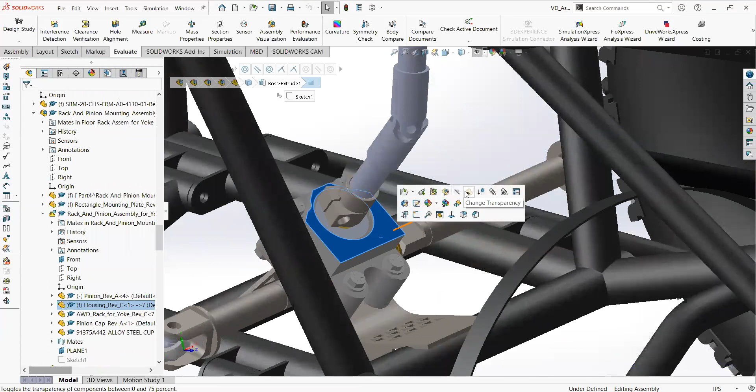That pinion is connected to a steering column made up of several tubes. In this case, we have 3 tubes connected with 2 single cardan U-joints, called single cardan because there's 1 point of movement within the U-joint. We have 2 single cardan U-joints because the rack for this car is off-centered from our center plane, so we want the axes of rotation where the steering column intersects the pinion and where it intersects the steering wheel to be similar.

The steering column is connected to a quick disconnect, which is connected to a steering wheel. The steering wheel turns the steering column, which turns the pinion, which turns the steering rack. The steering rack is also connected to tie rods.

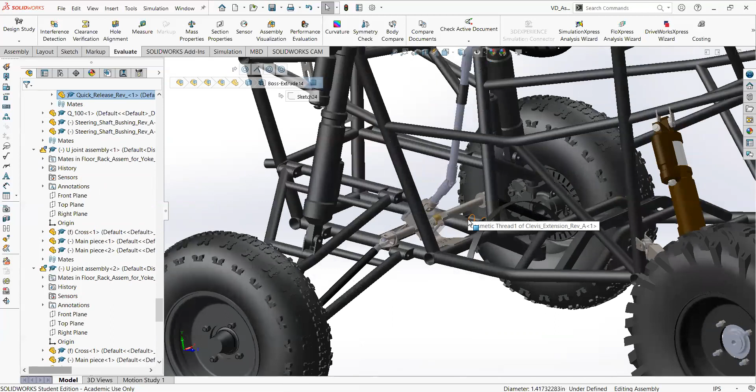For this year, the tie rods are adjustable, which if you zoom in you can see through the threads, allowing us to adjust steering characteristics of the car. This tie rod is also connected to a steering arm, shown on the wheel.

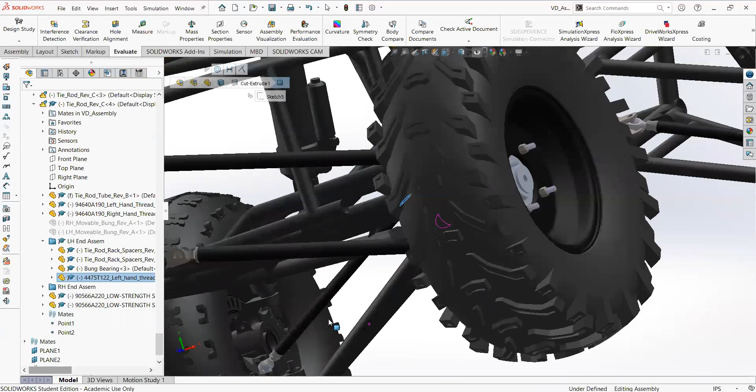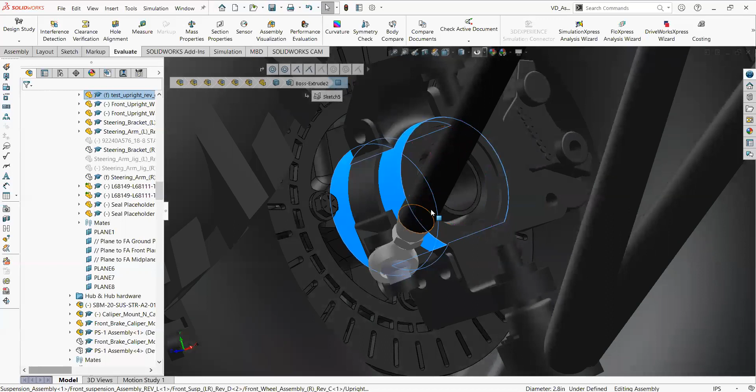The tie rod connects to a steering arm, which connects to a steering bracket, which connects to an upright, basically that big blocky thing in the middle of the wheel. So as you turn the steering wheel, you move the rack linearly, which moves the tie rod, which moves the wheel.

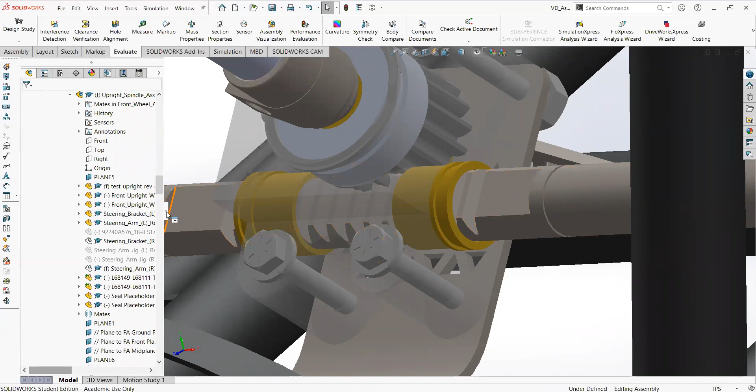If you look closer at the rack, you can see some blocky bits next to the sides of the rack. They're hidden here, but they'd be small circular bits called O-rings, and we call those bump stops because we don't want the rack to move too far from its center.

We want to prevent the wheels from locking, which means instead of the wheels turning, you're basically pushing the wheels against the ground. We don't want that, because that just prevents us from moving entirely.

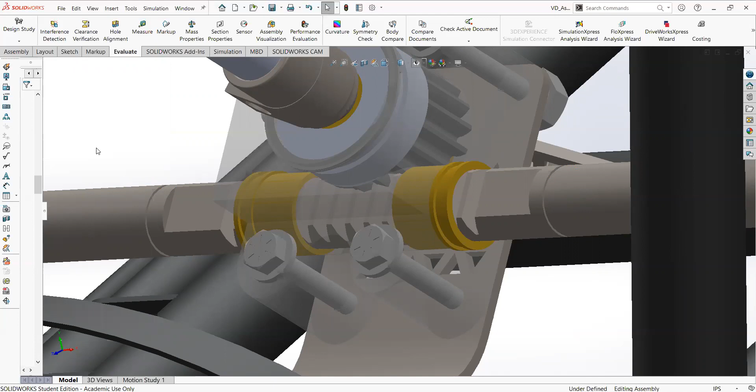For manufacturing, we were planning on manufacturing the pinion, but for now we're reusing old pinions from our steering rack. The old manufacturer for our rack is no longer in business, so we've taken to manufacturing the rack ourselves using the lathe.

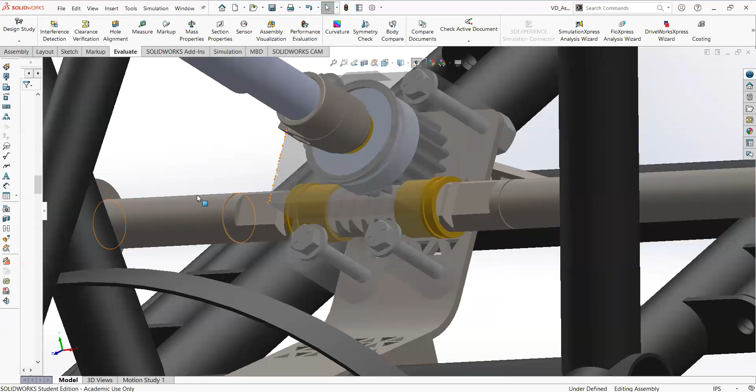To get the teeth made, we send those to off-campus manufacturers to finalize. As for the steering column, we cut the tubes and purchased the single cardan U-joints. That's basically it. Any questions?

To clarify a little more on the rack itself: something you'll learn later in your classes, there's a set number of teeth on this rack, and based on the different characteristics of the gear, like the pitch and so forth, the rack itself has a ratio of 6.4 to 1.

What that means is the amount of times you have to turn the steering wheel to get your tires to turn, so it's a ratio between your steering wheel and your tires. The higher your ratio, the more you have to turn your steering wheel to get your tires to turn 1 degree.

The higher that ratio is, the easier it is to turn your steering wheel, which is a good thing, but you also have to remember that the higher the ratio, the more you're going to be rotating your hands. You don't want to do that when racing because, first of all, you have wrist restraints on, so you can't overlap your hands, and also it's just undesirable.

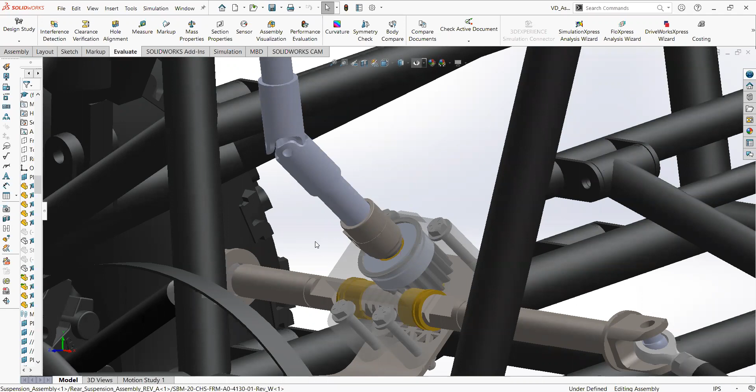There's also a lot that goes into the geometry — the coordinates. You can't just place your steering rack and steering arm in random locations. Steering and suspension, as we'll go into detail in a different lesson, are very specific.

There's something called toe and camber. Toe is basically how far in your tires are going. I can find a picture for you, one second, I can pull it up from the manual.

Based off of where you're putting your components, you're going to get different toe in and toe out values, and that changes how your car travels in a straight line and in curves, as well as over bumps. Let's say you're going over a bump and your tires want to toe in — then when you reach the ground, your car is going to want to jut in one direction and become unstable. So, long story short, we have to place these components in a very specific location to get desirable values.

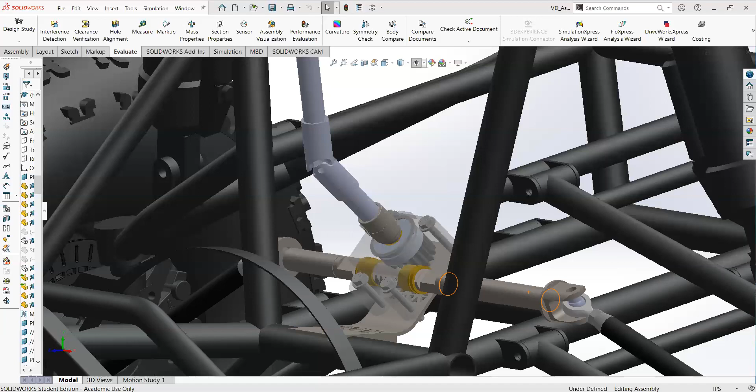So now you guys can see my screen, the SolidWorks screen. Yeah, we see SolidWorks, go on. Yeah, okay, great.

Like I said, we'll go over the different geometry points at a later time, but that's actually all I can think of for steering. Does anyone have any questions?

It's not a very intense subsystem by any means, but it is very, very crucial at the same time, so we do a lot of testing with this. We'll put strain gauges on components like our tie rods to make sure they won't break. That gives us a ton of data points on when the component experiences a lot of stress, whether it's going through turns, jumps, or over logs. So we'll be able to see when the tie rod is closest to breaking and if we need to increase the factor of safety.

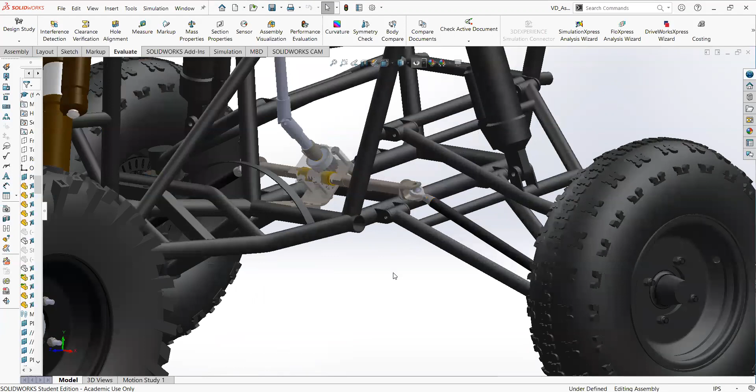That is a very big test we've had to do recently, and actually we weren't able to finish because of COVID. But the reason that was so important is because one of our tie rods actually broke during competition in 2019.

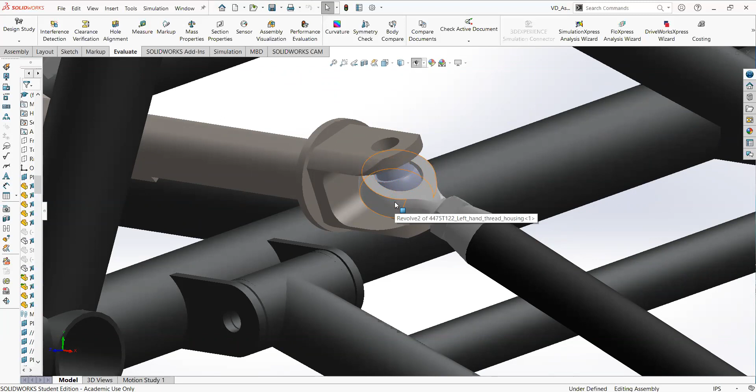The bung completely snapped off at this point, right here, it just snapped open. Thankfully we were on our last lap, so it wasn't completely devastating. We made it through the finish line with half of a wheel sticking out. It was kind of crazy, but obviously we don't want that to happen again, so we've had to do testing, and we'll continue testing when we're able to go back into the shop.

Does anyone have any questions? How do you adjust the camber or toe? I think for the most part it comes up to the software we use, isn't it? We can really only adjust toe with the adjustable tie rod, not really the camber.

Camber is a suspension characteristic, and you would affect the camber in different ways. Let me post a link of how. So that's more like suspension, not really steering, right? Right, camber isn't steering, but they go hand in hand. Recently we've had to create new coordinates or location points for our steering and suspension because we're redesigning the car. To change the toe, I've found that the components that affect the toe will also change the camber. But if your toe is getting better, your camber is getting less desirable, so it's hard to find that middle ground. Let me send a link for the camber.

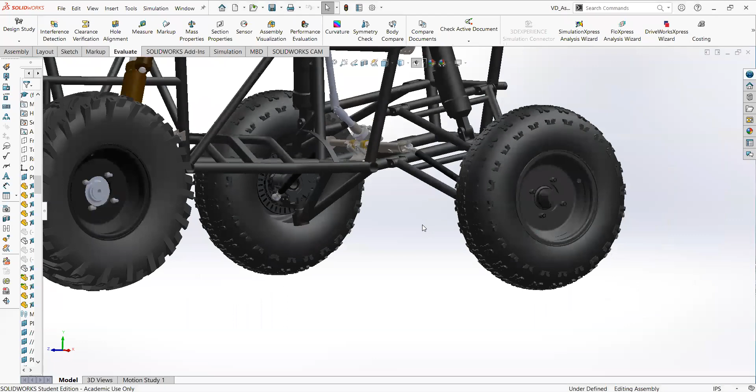I'm not quite sure if this is the question, but there's two components to it: design and implementation. On the design side, we're using the suspension software Lotus to get all our parameters together, which we use to make the CAD as well, but we use it to actually jig up the suspension itself when attaching it to the car. We set it up with the desired parameters in terms of caster and camber, such that we weld the tabs that attach the suspension components to the car in the position that achieves the desired suspension parameters. I'll go into more detail in our next lesson explaining what camber, caster, and toe is, and show the Lotus software we've been using, with examples of how changing one component throws off everything else.

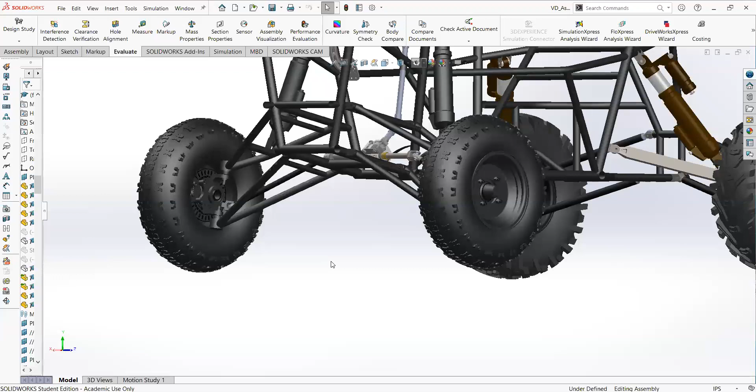So just in general, for something like Baja racing, do you want more negative or positive camber? More negative, I guess. It's better for cornering because the more you grip, you turn, right? Yeah, exactly.

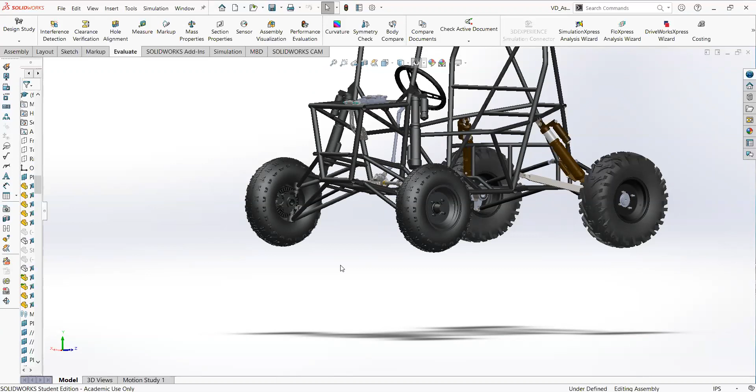Going a little more into that, when you have negative camber and you're going through a curve, your tires get pushed, and your contact patch - basically what part of your tire touches the ground - gets bigger. That's better during corners, so you have a greater contact patch, which is why negative camber is more desirable. I was asking because I thought it would be weird since it's dirt, not tarmac, so I couldn't imagine how that changes anything. Camber is one of the biggest suspension characteristics, and I personally feel it makes a very big difference, especially in cornering and handling.

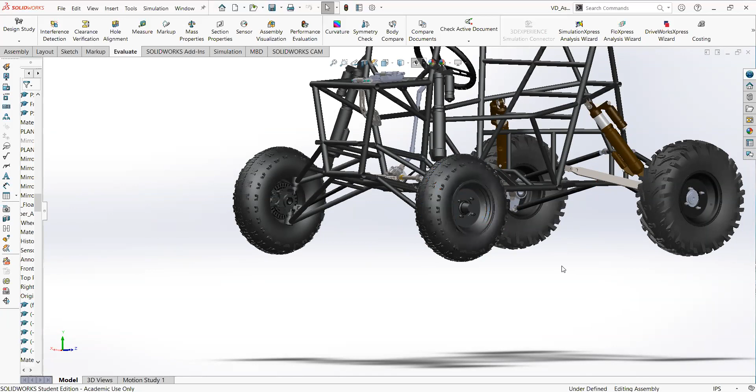All right, is that it for steering? Does anyone have any questions? I can't really see the chat, if anyone does, who doesn't? But if not, we can go on to suspension. All right, let's do suspension then. So Nikita, do you want to?

The suspension subsystem of the vehicle is responsible for the mitigation of all the forces that the vehicle experiences while in transit, as well as allowing for the delivery of power to the wheels from the powertrain. In the front, we have what is called a short long arm suspension, such that there are two control arms, wherein the lower control arm is longer than the upper control arm. Generally, we notch tubes into the shape they need for the suspension control arms, then jig them up and weld them.

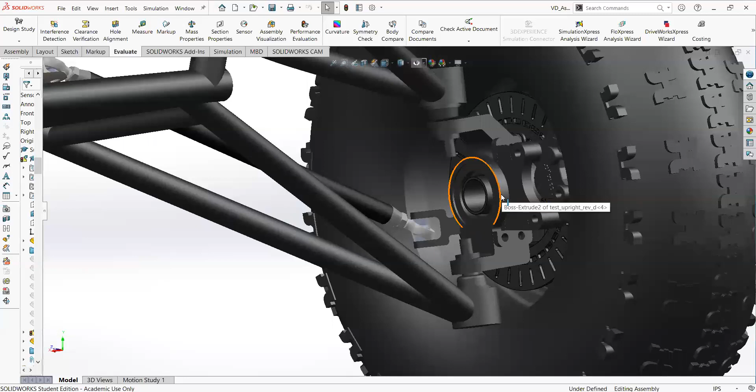As you can see, there's an upper control arm to which the shock itself is mounted, and the chassis mount of the shock, and the lower control arm. Both control arms are attached to the upright, which contains the hub of the vehicle. On the upright, there's also the steering arm, which connects the steering rack to the upright, enabling steering input to be delivered to the upright to change its position while in transit.

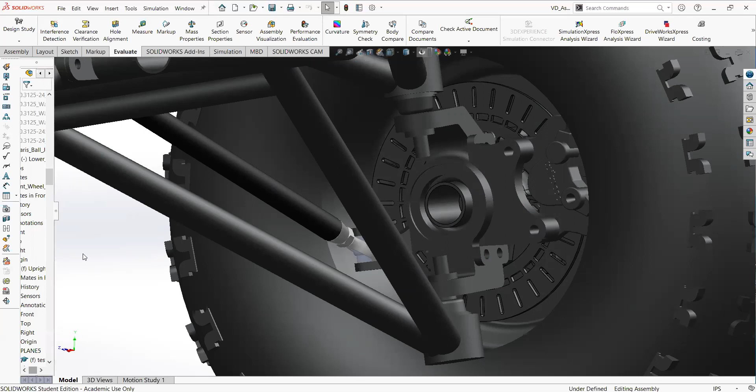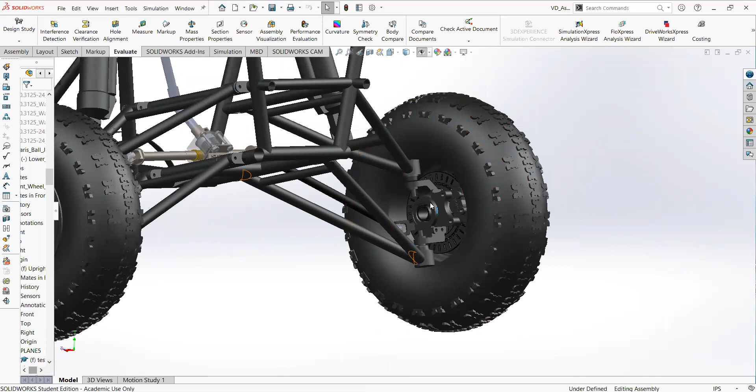Wait, hold on, can you pause for one second? Does anyone know how to change this from being black so we can see it properly? I think it's a render thing - the more components you have, the more the computer has to allocate for rendering until a limit is reached. I feel like some of us have changed it all to the same color. I thought it was different colors before, but I could be wrong. Maybe someone changed the material? I don't think that's the case though - the shocks are black, so I think it's just rendering. Someone's changed the color. We can argue about that later, it's fine.

This part is the upright. I don't know if you guys can see it, but this whole thing - as you can see, the upright allows for interface of all these components.

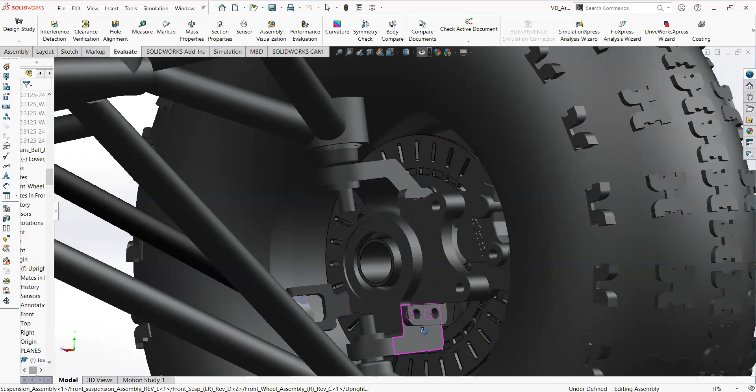You have the attachment point for the brake caliper, and then the brake rotor, which is attached to the hub, which is attached to the upright. Between the hub and the upright you have multiple bearings to allow the hub to spin and to allow power to be delivered into the hub by the CV axle. On the hub itself is mounted the wheel and tire, respectively.

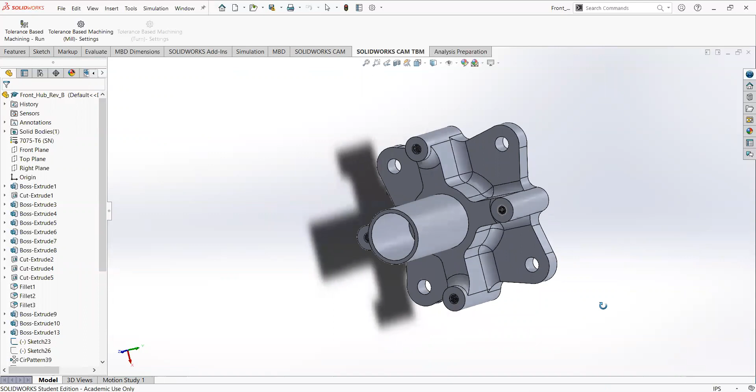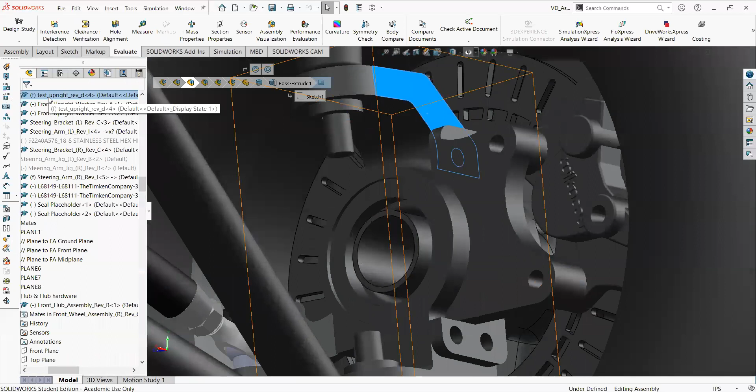So as you can see, this is the hub. You have that part sticking out which is where the CV axle goes into. This interface between the axle and the hub is called splines, but that's a whole other discussion. The axle goes in there, and then you have holes on the inner end of the hub to which the brake rotor is mounted, and on the outside you have the holes for mounting the wheel itself.

This right here is the upright. As you can see, you have the points on the top and bottom to which the control arms are attached by means of the ball joint. I'm not sure if y'all have experience in automotive, but it's a fairly common component.

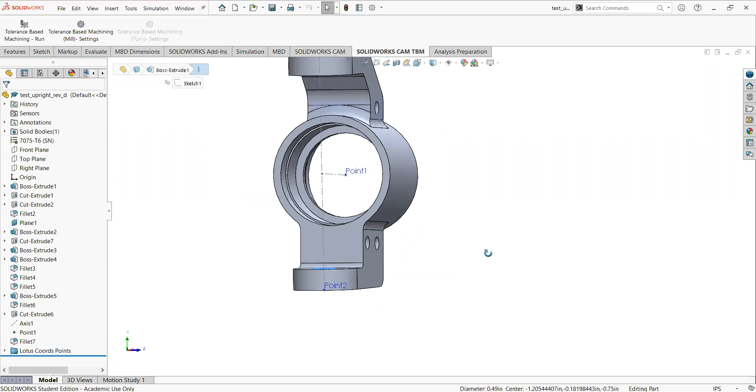Then you have the area in the center for mounting the bearings on which the hub is mounted, such that the hub can spin. You have the holes on either side of the upright to allow interface between the brakes and steering to the suspension, such that the brake caliper attaches on one side of the upright and the steering fork on the other side.

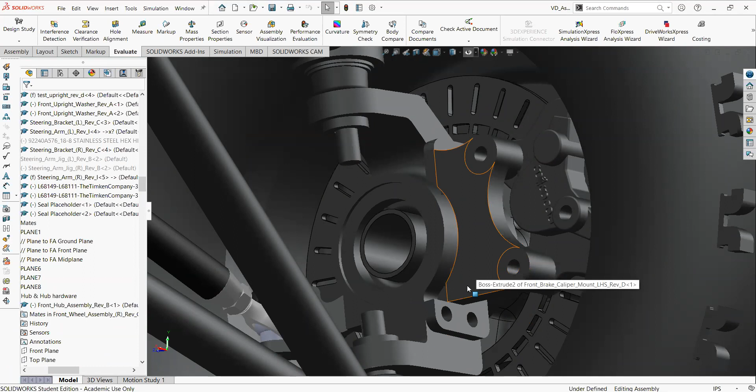The brake caliper and brakes - this is currently Rev A, so things will be switched for Rev B - but you can see that's on one side of the upright, which is this thing, and then you have the steering arm on the other side, which is attached by the steering bracket to the upright.

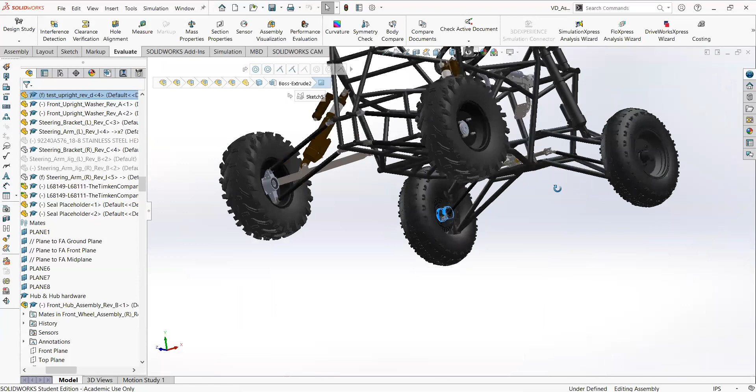Yeah, okay. Do you want to talk about the shocks now? And then we can go to the rear.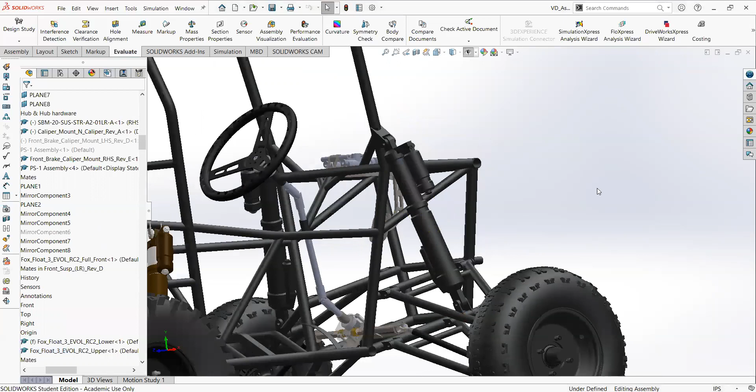The shock absorber itself is a component that absorbs the shock that the vehicle experiences while traversing terrain. You can see it's attached to the upper control arm as well as the chassis. So when the wheels go up and down, the forces that the vehicle experiences are mitigated by the shock absorber component.

I'm not sure if it's worth going into specifics, but this particular shock absorber has 3 different chambers in it to allow for a variable rate of motion of the whole suspension.

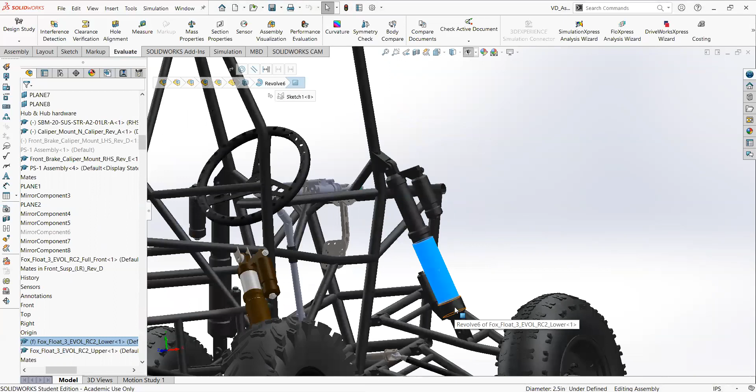Yep, and we currently use air shocks. There are different types of shocks - coil shocks and air shocks - and one is cheaper than the other. We're going to be looking into whether we need air shocks or if we can use coil shocks. That's probably going to happen when we get back into the shop, because we need serial numbers and stuff for our current shocks to figure out a good comparison. But currently we use air shocks.

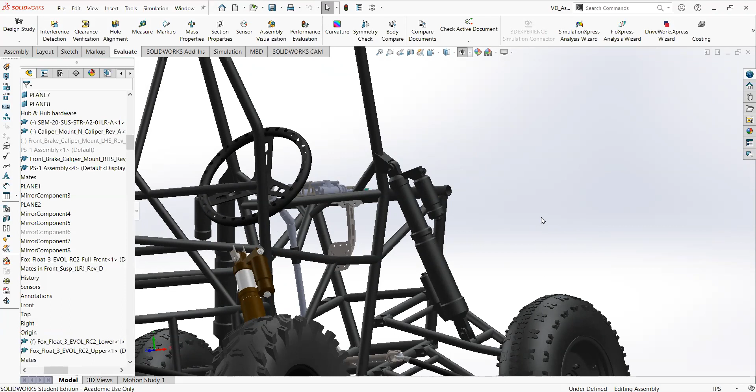This is semantics, but I do not believe what we currently have is 100% constitutable as an air shock, because I think one of the chambers in the shock is nitrogen only, and the other maybe some other fluid. Not really a coil shock, something that involves gases of some sort.

So I'm assuming coil shocks are cheaper. Yes, they are. It definitely depends on the manufacturer, but a lot of teams run coil shocks. There are certain teams that run what we're going to call air shocks, but a lot of them run coil shocks. I will also send a picture of this in the chat.

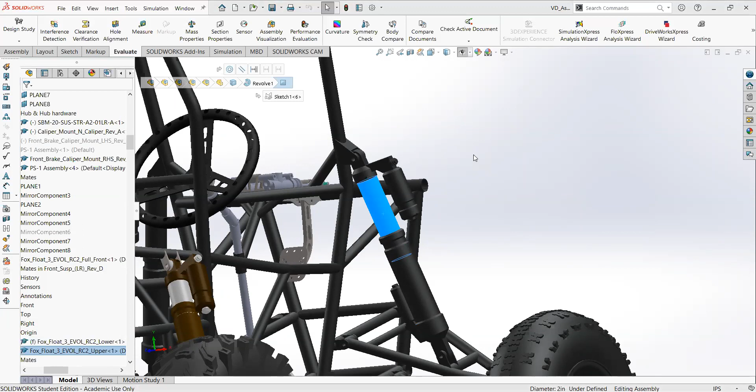All right, do you want to move on to the rear? Yeah, so in the rear you have the suspension known as a multi-link system. You have the trailing arm as well as the lateral links, which connect the upright to the chassis of the vehicle. You can see there's a variety of different connection methodologies on either end.

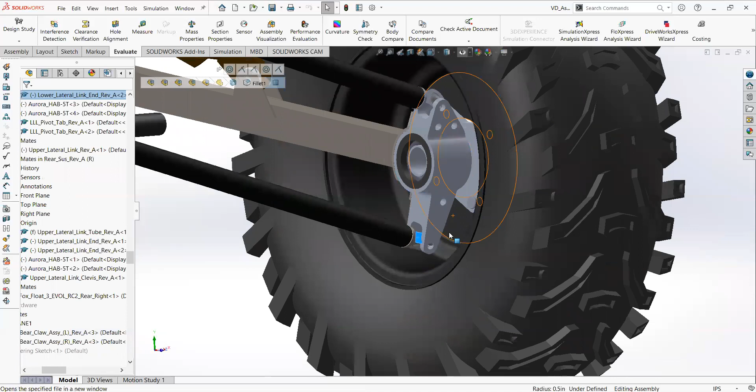So we shall start with the lateral links, which have bungs on either side that are welded to a tube. On each of the bungs, there is a spherical joint that allows for constrained motion of the lateral link.

Then you have the trailing arm, to which the shock is attached. This is the component that experiences the most force and mitigation of forces experienced by the vehicle. Its motion is a little more constrained than the lateral links to help it absorb the forces resulting from the motion of the vehicle. You can see it consists of...

I'm sorry, do you want me to turn somewhere? I don't really know where. No, I'm just thinking how to explain. Oh, okay.

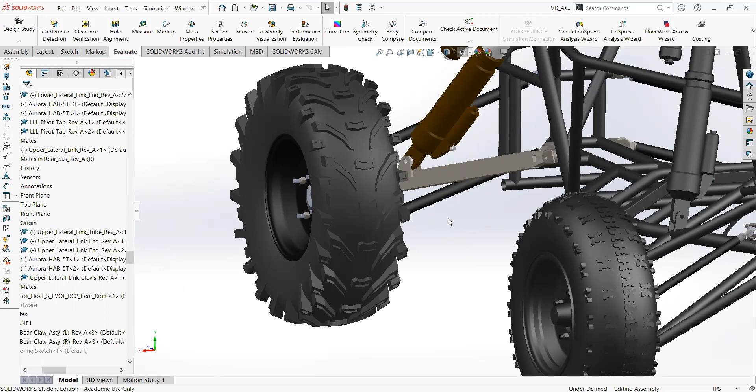So you have the trailing arm upright connector, which connects the trailing arm to the upright, as well as the bung on the other side of the trailing arm. These components are welded together and the tube itself is notched so that it will fit the machined components on either end.

I apologize, but how far into detail should I go in terms of manufacturing techniques? I mean, you can talk about as much as you want to.

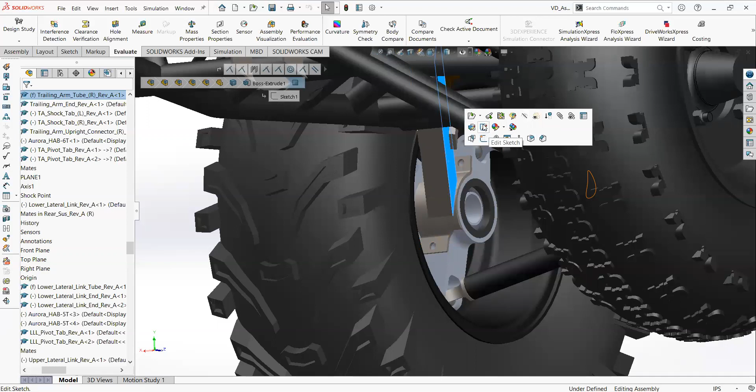So with the upright, you have a similar situation where it needs to allow for the passage of the CV axle into the hub to deliver power to the wheels of the vehicle. As you can see, the upright in the rear is different from the front, just based on the different components it has to attach to and stuff like that.

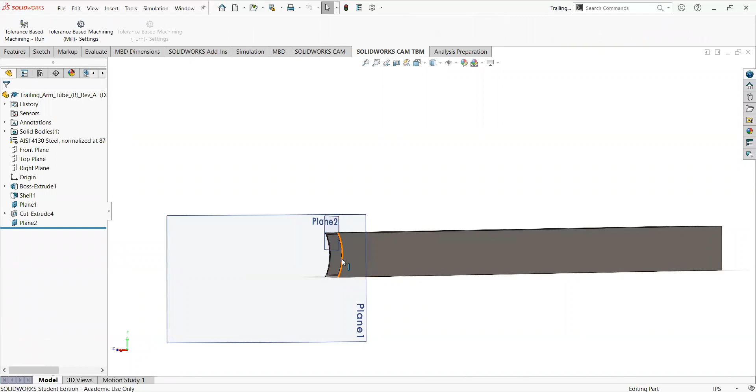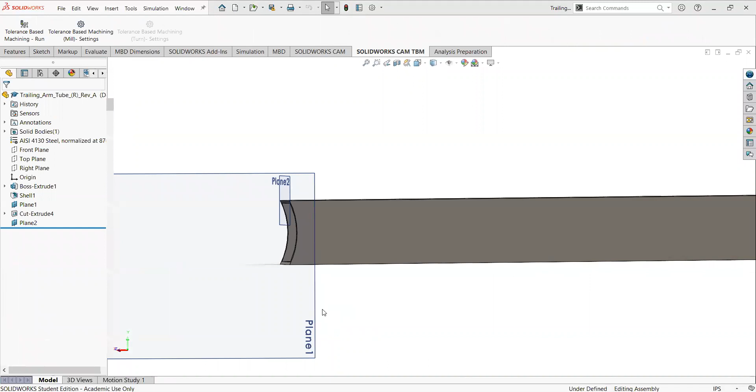Also, if you guys don't know what notched means, it's this curved feature here - basically taking away material from a tube or component so it can properly interface with something else. Sam could go more into that, but here we have a curved notch so it can attach to the rear upright and fit the contour of this bracket, the connector, so it can interface properly and you can weld it.

As far as manufacturing techniques go, quite a variety are employed. For example, for the connector we use EDM machining - I'm not sure if you've heard of that, but effectively it's a very hot wire used to cut contours out of metal. We would cut the contour of the upright connector out and then perform additional machining operations.

And for the hubs and uprights, both in the front and rear, they're really quite complicated parts that require usage of both EDM machining and CNC machining, not to mention any possible additional operations. Also, currently the rear hubs are different from the front hubs, but we're working to see if we can make them uniform, which will be really good for manufacturing because then the CNC can just cut the same thing instead of being set up for different operations.

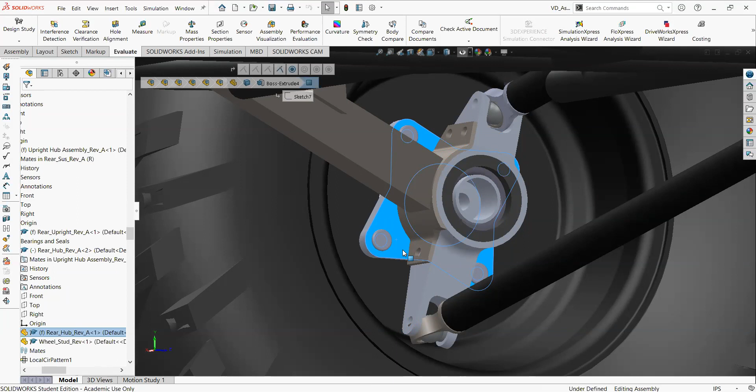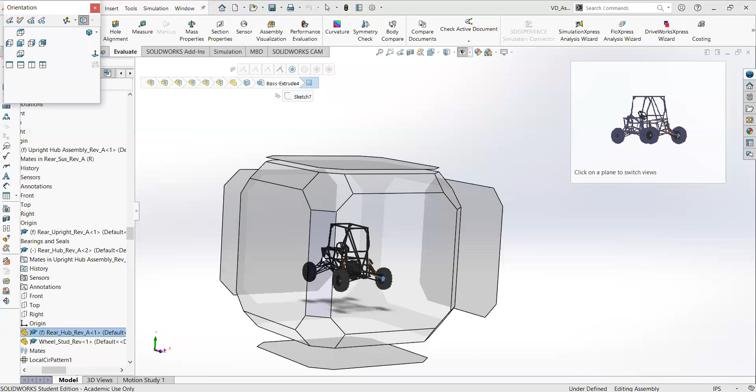Is there anything else for suspension that you can think of component-wise? I feel like that's just about the basics of it. Does anyone have any questions on suspension? If you want me to zoom into something, or anything, let me know.

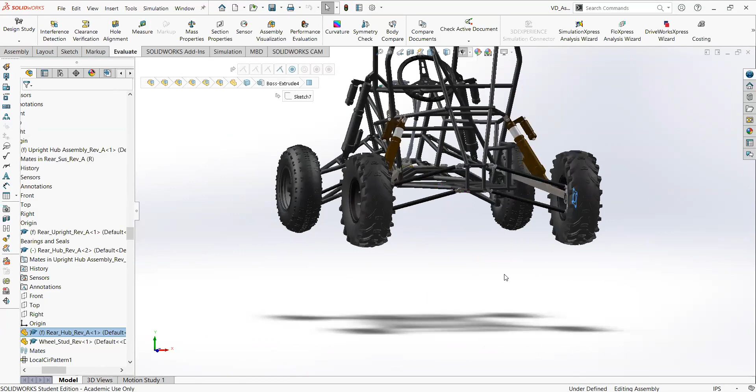So how come you guys use air shocks instead of coil? So that was something that was decided by earlier teams. They decided to go forward and buy these shocks. However, these shocks were very expensive.

One of the reasons why they wanted shocks like this is because it's adjustable. You can tune it based off the different chambers to get more desired characteristics if you know how to tune them. But what I've heard from previous years is that they don't really use that tuning aspect, which is a big feature for these current shocks. That's kind of why we're trying to see if there are other shocks we can get, because we're paying so much for these and not really using them to their full advantage. But there are 3 different chambers which control different components of the shock, and that's why a lot of people run air shocks.

Yeah, I believe part of the reasoning is also that conventional spring-based shock absorbers would only allow for a set spring rate, if that makes sense. Whereas what we're using allows for a variable spring rate and then wheel rate, respectively.

So there's a lot of manufacturing that goes on in this subsystem. There are some things that we send out to get, but very, very few. We purchase the shocks, but most of the stuff in this subsystem is made, whether it be on the lathe or some type of mill, whether it be the CNC or a hand mill, and then the EDM as well. And there's a lot of welding that goes on.

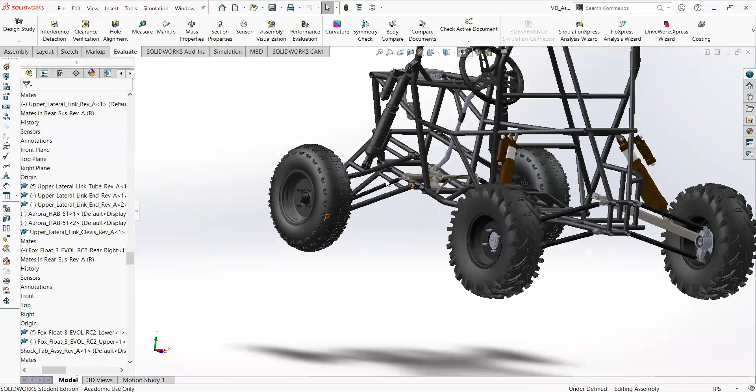Okay, thank you. I've got a question. I can't see from this angle really, but are the shocks directed relative to the front plane of the car? Is it like a directed upwards thing? Is there any forwards or backwards angle to the shocks? Okay. And what decides what angle forward or backwards the shocks are at?

It's a number of factors. I think you could first consider the force distribution situation, because obviously different angles and different mounting positions give us different force distributions, so some may be more desirable than others. Another element of it is the actual packaging, if that makes sense, because part of our intention with this design was to preserve the kinematic properties of the previous design while allowing for the passage of power delivery to the front wheels, which we must do now. So the shocks are a relatively similar configuration to that of the past design, to try to preserve some of the properties of that design in this particular design.

Also, for shocks, we already bought these shocks shown here, which are the air shocks. We bought them for the last competition, which obviously did not happen. And when you buy a shock, you have to buy them to a specific length, so there's only so many configurations you can do with one length. You can have it at different angles, but if you have it at different angles, then the force distribution is going to be different—you're going to have different handling characteristics because certain forces are not going to be going through the shock like that. So because we had this current shock, we knew it would have to be at this angle. We wanted to preserve what we had in our rear-wheel drive car because you don't want to change all your variables at once—you won't know what is wrong and what is right. And because we kind of knew this was something that would work at such an angle, we figured we'd keep it this way, and if we need to change it, we can.

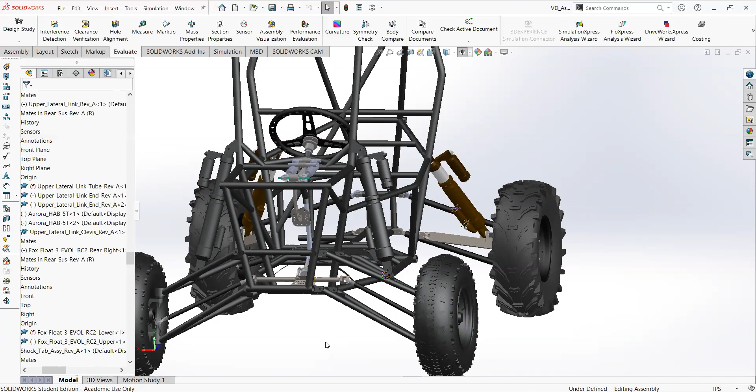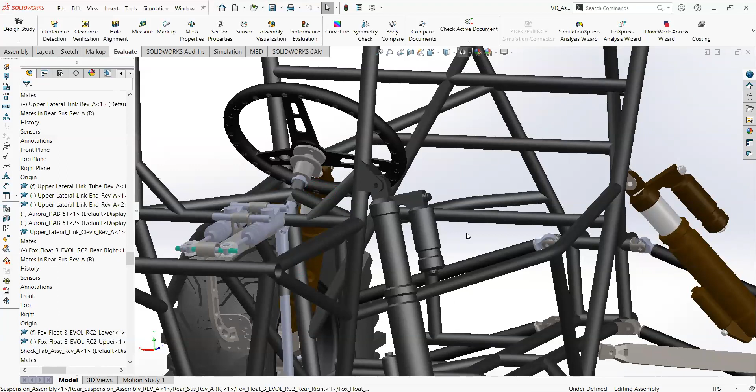Okay, Janet, do you want to explain the brakes? Sure. We can break the brake system into three main components, and we'll add more as we travel through the concept: a master cylinder, brake lines, and calipers.

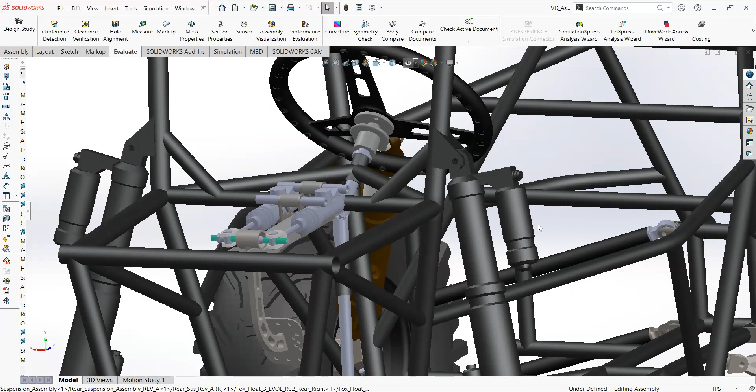So when you're driving down the street at a certain speed, you decide to press down on the brake pedal, you exert an amount of force, and after a couple of seconds you stop, ideally. But the force you exert from your foot onto the braking pedal is not enough, as a human, to stop the car. So what happens? The braking system multiplies the force you exert, and that's what causes the car to stop.

If we take it from the top, from the master cylinder—on top there should be a reservoir, which is like a little tank. The purpose of this reservoir is just to hold fluid, braking fluid in this case. Like a lot of fluids out there, it's non-compressible, and this is very important—we'll talk more about it. The reason I bring this up is because you don't want any air in the brake lines, because that would really mess up the entire braking system.

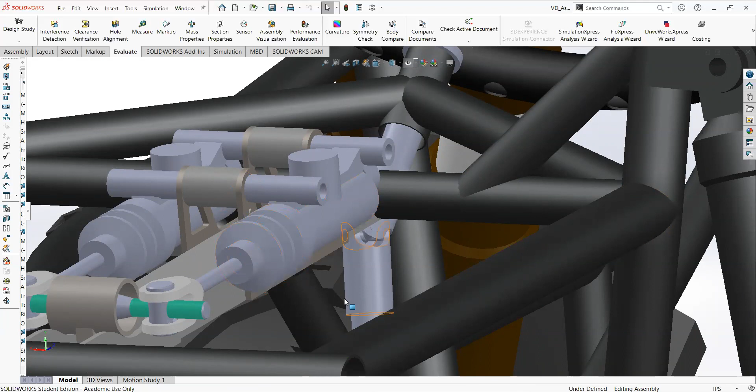So, you're driving, you step on the brake pedal, the fluid from the reservoir travels down to the master cylinder. If you were to look inside the master cylinder, you'd find a spring, a little piston, and a push rod. You would also have brake lines connected to the master cylinder.

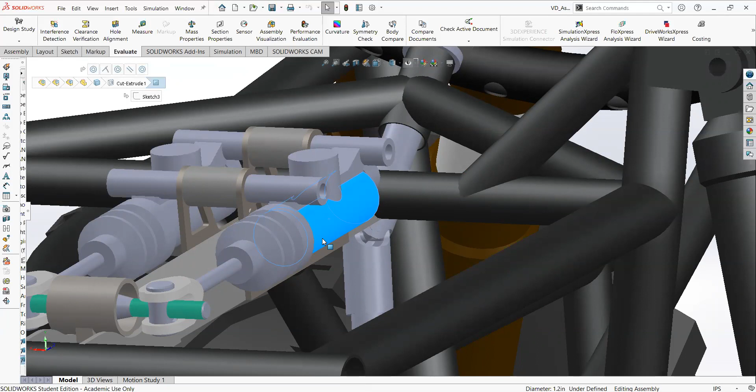Now the brake lines lead to the calipers in the front and the calipers to the rear. We have to use a little bit of imagination because the brake lines are basically thin little tubes. They're flexible, and could be plastic or steel. At least that's the brake lines we use in this Baja car.

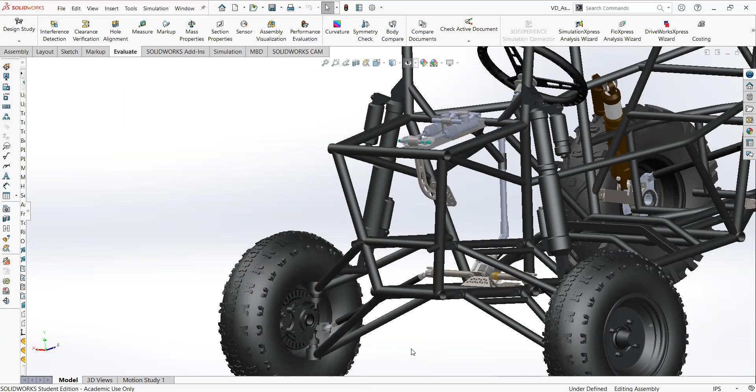So the fluid from the reservoir travels from the master cylinder to the brake lines to the calipers, and the calipers are just like a holder of sorts, a holder that has two pistons. It could have one piston, but we use two. And when we exert that force, the fluid pushes out the pistons.

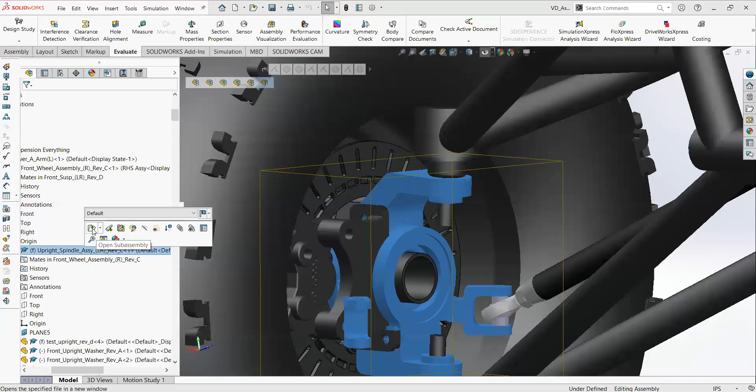Inside the caliper are brake pads, and in between all of this is the brake rotor. So combining everything: you drive the car, press the brakes, the fluid from the top of the reservoir travels from the master cylinder to the brake lines, to the calipers. The calipers then, from that pressure, the pistons exert out, compressing the pads, compressing the rotor, and causing the car to stop. So that's basically what it is.

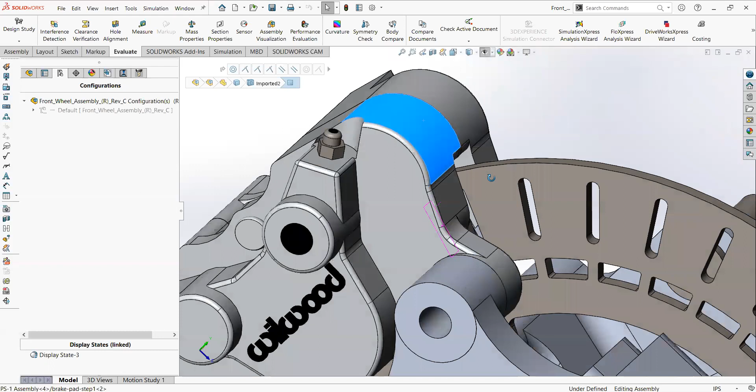In the beginning I mentioned the force that you exert. So the brake pads are in here, and this is the master cylinder, just so you guys can see it a little better. I mean, not master cylinder, sorry, the brake caliper. And then this is the brake rotor, and inside of this you have the brake pads.

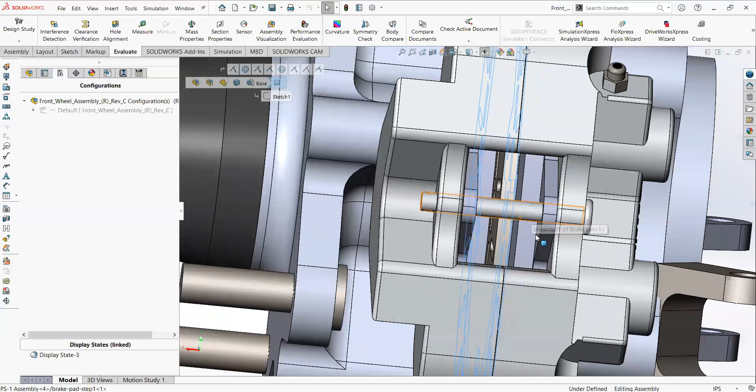There's two of them, so they contract to stop the brake rotor from rotating. And if you see those circles, that's more or less where the pistons are. So that's where everything contracts and stops the rotor from spinning. Because when you're driving the car, the rotor spins, and when you want it to stop, you need that friction to stop the rotor from spinning, and thus the car stops.

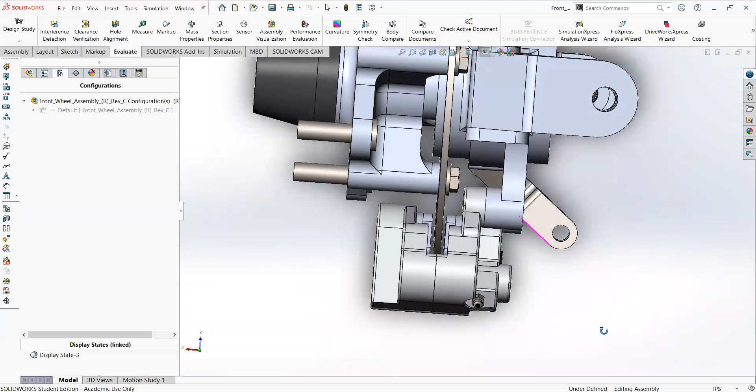So to go back to how the force multiplies, which I mentioned in the very beginning, I can give an example, and if it doesn't work out we can pull up some pictures. The idea I want to throw out there is that the increase of force is directly proportional to the decrease in distance. To drive this point home, imagine a seesaw with a midpoint, and two kids of similar weight on it, so ideally it's balanced.

If you were to move the midpoint left or right, so there's like a 75-25 break, and this is independently, right? If one kid of the same weight goes on the 75% side of the seesaw, it will move a certain amount. But if that same kid, same weight, goes on the 25% side of the seesaw, there's a lot more force produced on the short side. That's just the way it works.

The way your foot force is multiplied in the braking system kind of relates to the distance to the pivot point, and then the distance from the pivot point to the piston head. I'm seeing that my connection is unstable -- can you guys still hear me? Can you repeat that last line about the piston head?

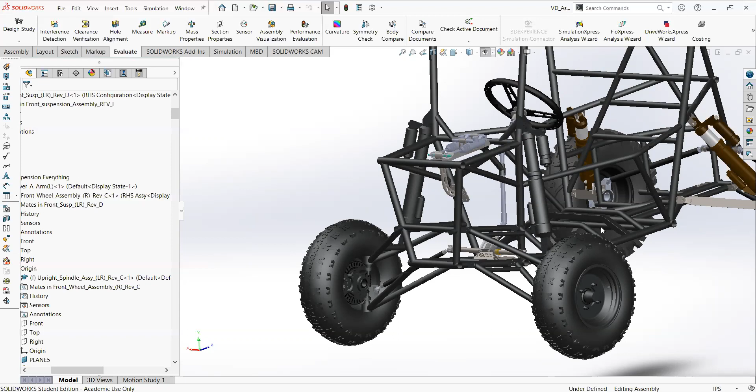Oh okay, yeah. So in the system it's the same concept as the seesaw: it's the distance from the brake pedal to the pivot, and the pivot to the piston head. The master cylinder does have something to do with how we exert force, but basically the majority of the time, the distance of the pedal to the pivot is 4 times the distance from the pivot to the piston head, which is why when your foot exerts that force to brake, the braking system exerts force 4 times the amount that you did.

And again, just stay on the caliper and the master cylinder, because the master cylinder does play a big part of it, depending on the input of the cylinder, so the circumference of everything also plays into it.

What is our brake bias that we currently have? The bias bar, how much is in the front and how much is in the back? Currently I think it's 60-40, with 60 being in the front and 40 being in the back. But we always kind of move it around just because we do want the wheels to lock, and that's always kind of been our problem.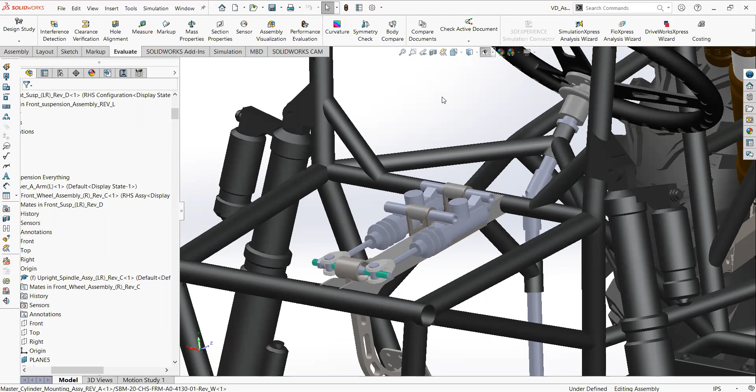We also have a proportioning valve, which I think the car has. It should be like on the right side if you look at it from the top view. But I'm not sure if it does... oh, it doesn't. Well, we also have a prop valve, which does kind of the same thing, it just directs more focus towards the rear brakes.

The reason why we first implemented these two things was because we had a lot of problems at competition. There's a component where you have to do a whole bunch of tests, acceleration test, braking test. In the braking test, you drive, you brake at a certain point they indicate, and your wheels have to lock. We've had a lot of problems where our rear wheels, and sometimes our front, wouldn't lock.

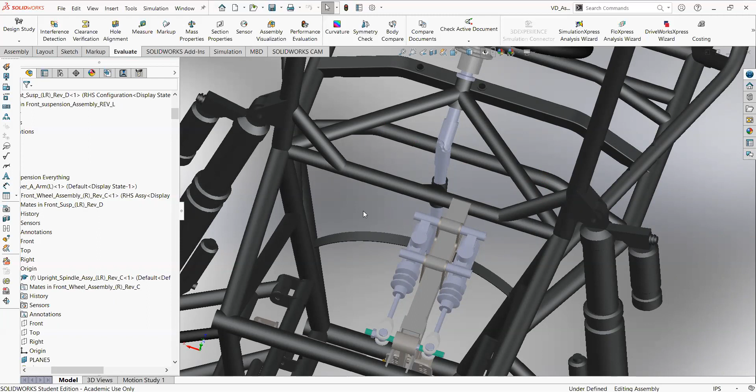If you don't pass that, you can't go to the endurance part of the race. It's convenient to have on the day of, since we didn't really create the system all too well, to calibrate it there and play around with it to see if we can make those adjustments. But we do have to put in more work to really understand and research how we can go to competition without needing to toy around with the braking balance too much. That's what it is.

I don't know if that was your question, Neha. Yes, that explained it well, thank you. Okay, cool. Yeah, and that's it.

I'm sorry, I forgot one thing. About what we manufacture, we don't really fabricate a lot of things in-house for brakes. The majority of the things are bought, or we have one of our sponsors help us out, and they manufacture it over there.

The things that we manufacture in-house would be like the caliper mounts, the master cylinder mounts, any spacers we need, the tubes and the master cylinder tube that's highlighted right there. All of those things are manufactured in-house. We're trying to manufacture the bias bar, well, design it, because we can't really manufacture it now. For this subsystem, we don't really manufacture a lot, it's mostly store-bought, or our sponsors help us out with that. So yeah, the end.

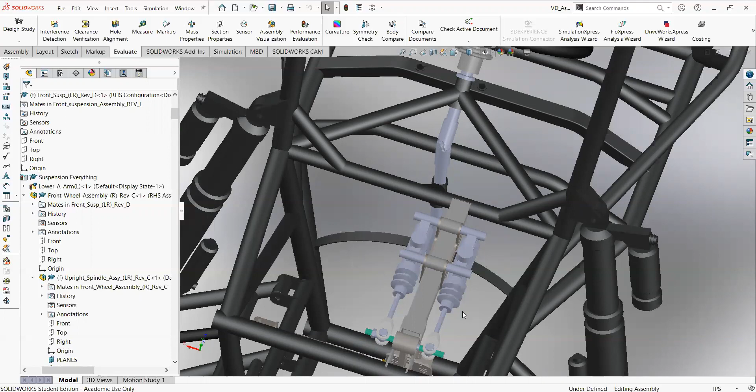So for the all-wheel drive car, something we've had to work with for brakes was trying to figure out where we're going to place the brake pedal. Depending on the length of your brake pedal, you're going to have a specific, if you took Mech 101, you'll know what I'm saying. I just can't really explain it right now, but you have like a... do you know what I'm talking about, Janet?

Like the amplification, like it's a mechanical lever. Do you know what I'm talking about? Yes.

So basically, the problem that we had is that the original setup of our brakes, the brake pedal was a lot lower. But the reason we're lifting it up is because we have so many things in the front due to the all-wheel drive system, that if we left the pedal where it was, when you press it you'd bump into a lot of things. It would just not be convenient, it would be really weird. So we kind of have to lift that up.

Thankfully we didn't really change the size or length of the pedal, because if we did, that would again mess up our original braking system, because of the moments Ryan mentioned, and how the length is proportional to the force we exerted, similar to the example of a seesaw. But we just lifted it up as a way to not mess with any of that work.

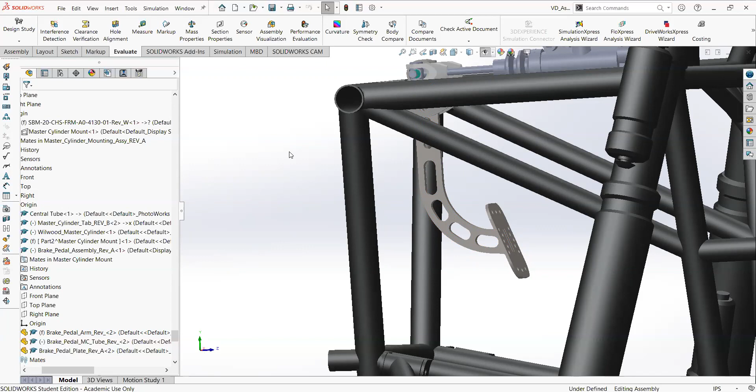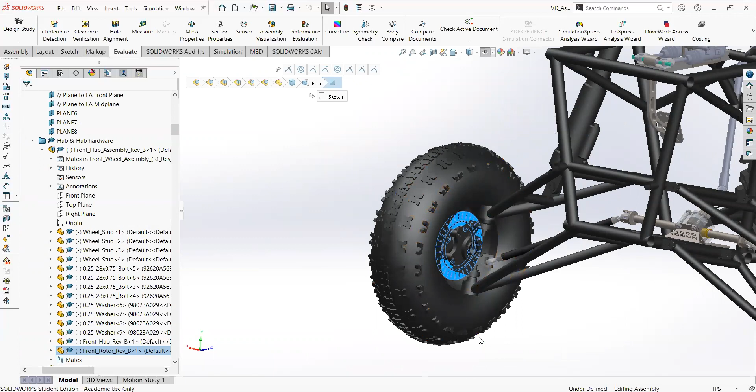Yes, there's that. For all-wheel drive, there's inboard versus outboard brakes. In the front of the car, we have outboard brakes, meaning the brake rotors are on the outside, located inside the tires. In the rear, which you can't see here, the brake rotors are on the chassis itself, inside the chassis. For our all-wheel drive car, we're trying to see if in the front we can also have inboard brakes, so we can push the brake rotors from being out here to inside as well.

A lot of it has to do with packaging. It also depends on where you want to stop the transfer of motion. Is there anything else you want to explain about inboard versus outboard brakes, or the pros and cons of having one versus the other, why we have inboard in the rear?

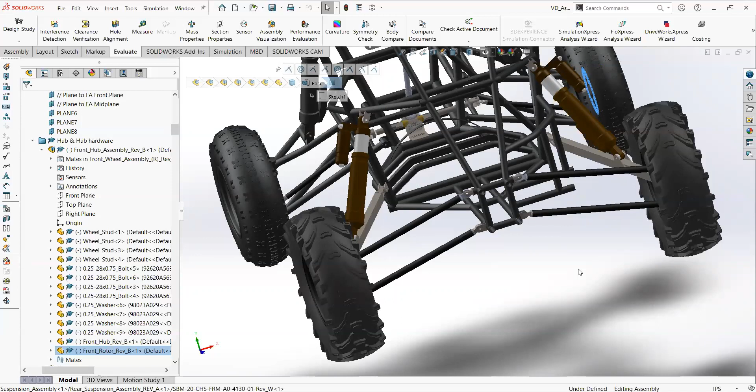Nate had really explained it well. If we want to break it down simply, outboard brakes means the brakes are outside of the car, inboard brakes means the brakes are inside of the car, visually. You can always have the debate that with outboard brakes, you run the risk of all the components getting dirty, of things getting inside the rotor, and that overall just negatively impacts our braking system. There is a debate and a point you can make of that.

But a lot of the times, as Nate said, it's more compact to have it inside. It just depends on what's best for your car and the placement of the brakes. If you have it on the outside, it's a bit easier to take something out if positioned favorably, versus the inside, where it can be harder to get in with your tools, which becomes a pain. So it really depends on what better suits your needs in terms of packaging, because there are positives and negatives, but in the long run they don't really contribute to major braking loss or gain.

I've got a question more on the braking systems overall. Does the way the brakes work impact the way that the tires are chosen?

The tires are actually chosen as part of suspension, that falls under suspension, like tire treads. Yeah, I don't really think in the past there has been a correlation between both of them, I could be wrong actually. That's a pretty good question. But all I know is that suspension is responsible for choosing the tires.

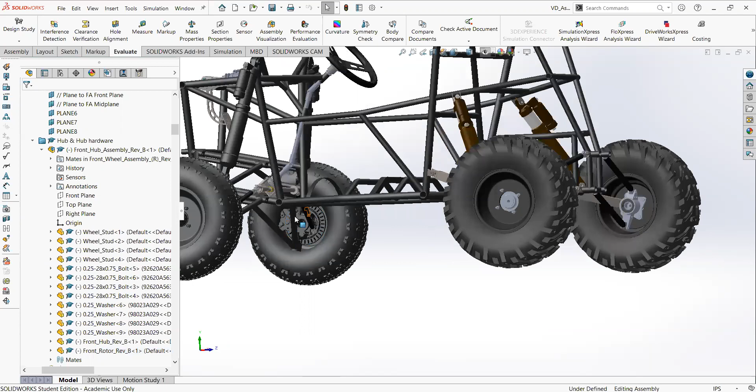We're checking to see if the current calipers we have are overkill or not. Because if they are overkill, then we can probably find smaller, more compact calipers, especially in our front, because our front has so many components between steering, brakes, suspension, and powertrain, since there's a differential in the front. That means the packaging is very, very tight in the front.

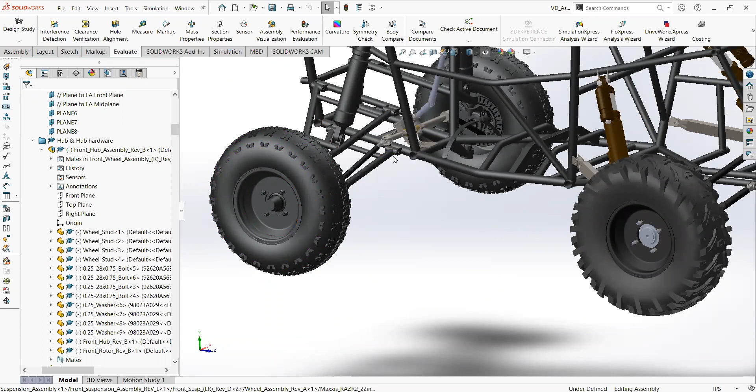So if we could find a way to—well, first of all, this entire thing is about trying to bring the outboard brakes, having the calipers basically on the hubs, to what we have in the rear, which is called inboard brakes, where it would be much closer in the front to the differential. So to do that, we need more compact packaging for this caliper-rotor combo.

So basically, me and Jonathan are going through calculations to see if we can reduce the size of the rotor, because right now our rotors are about 7¼ inches in diameter, and we'll see if we can reduce that to about 6½ inches, while still generating enough force inside the calipers to lock up our wheels. That's basically an overview of what we're doing.

Yeah, so basically you can change your caliper size and you can change your brake rotor size. It's kind of about finding the perfect fit for both of them. Yeah, that's with everything, right? The perfect fit. Yeah, exactly.

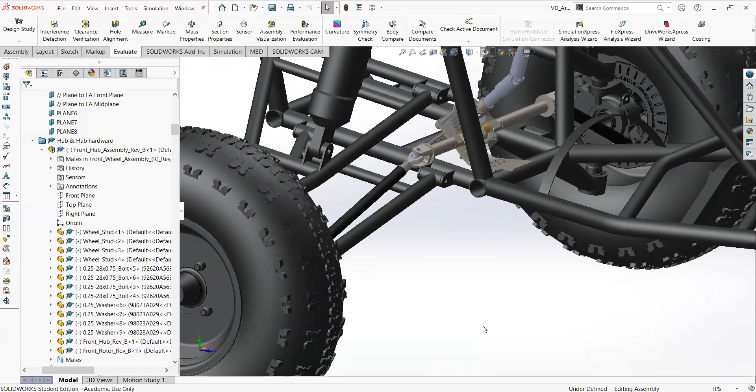Does anyone have any other questions about brakes? This is a really bad question, but where's the engine? Where do you put it? Is it in the front or the middle or something like that? So our engine is in the rear.

Oh okay, yeah, but we have a differential in the rear as well as a differential in the front, which isn't really seen here. That is how we get the transfer of power, and we will also be having a drive shaft that goes from the rear as well.

So now you're saying you have a diff in the front and a drive shaft—was it rear wheel drive at one point? Yes, so the years before this, we've had rear wheel drive cars. That's actually why we're doing a ton of revisions. That's interesting. Yeah, so now it's all-wheel drive. There's a lot of testing that needs to go in because of that.

Everything about the car is basically changing. Oh, it's gonna be better, hopefully, though. Hopefully. Hopefully.

So to quickly say what we're going to be doing for this new revision of the car: we're going to be working on suspension characteristics as well as steering characteristics, manufacturing the bias bar, like what Janet had said, working on unifying the hubs, doing brake calculations, changing our steering arm, finding different steering wheels so we can help with the ergonomics and driver comfort.

Another very big thing we're going to be doing is FEA on all of our components. You guys will be taught how to do FEA, which is structural analysis, making sure all the stresses are proper and that we have enough factor of safety. That's kind of a general overview of what we plan on doing for vehicle dynamics this semester.

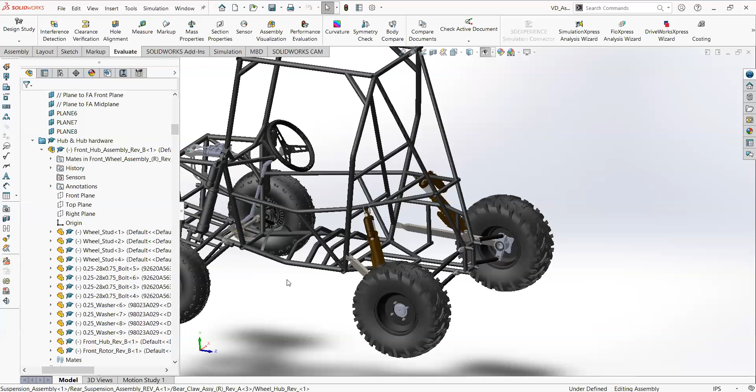Are we going to end up choosing a subsystem? So I'm actually still deciding on that. That's something I kind of want your guys' input on. I don't know if you guys would be interested in working more with a specific subsystem.

Obviously, if you do choose to work with a specific subsystem, you can change to any subsystem you want. That's one option. Or you guys can just be a general VD member, and whatever subsystem needs help, you can help them with that. In the past, we've done it so people go into specific subsystems, but it's all up to preference, whether you want to know a lot about one specific subsystem or know about all of them and just help whichever one needs help.

Of note, even if you do pick subsystems, you can always work with another one. There's no limit to who you can work with. So it's whatever you guys prefer, honestly.